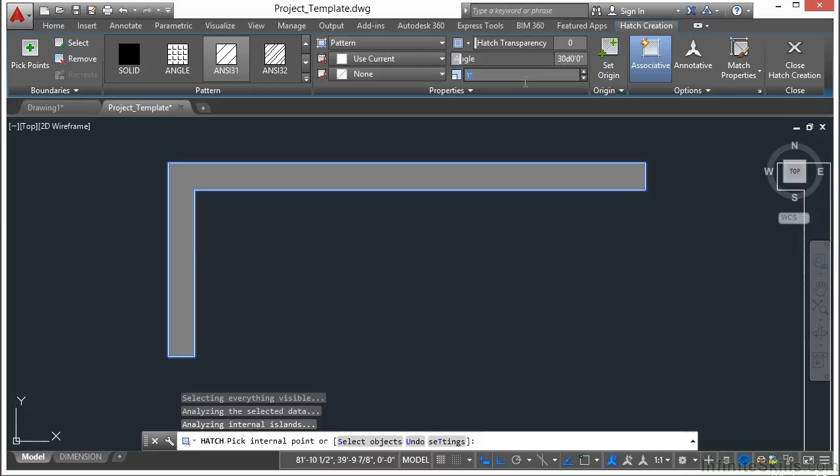We're going to use a hatch pattern of ANSI 31 at an angle of 30 degrees, and pick inside our objects. You can zoom in; we're going to use the pick points option. Click in here. That pattern is a little too tight, so we're going to give it even a little more.

Let's set the scale to 20, and that looks good. So that's the pattern we're going to use: ANSI 31 at 30 degrees with a scale factor of 20.

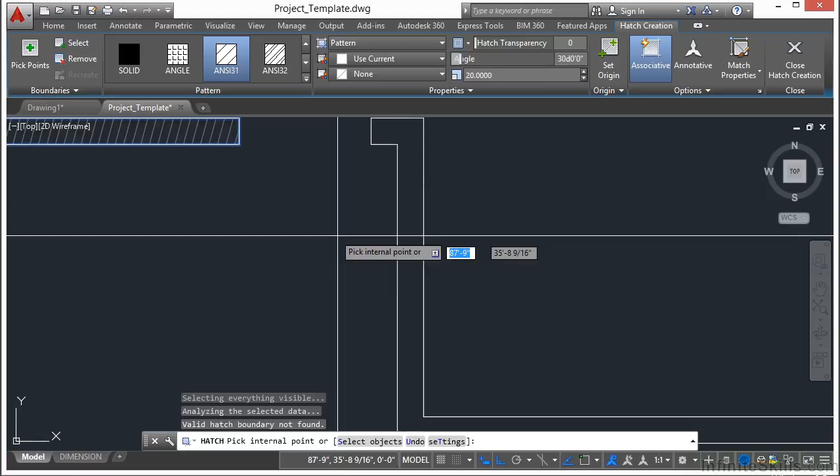And we're going to pick inside each of these objects. Sometimes when you zoom in too closely, AutoCAD just kind of freaks out and can't handle it, so you just have to zoom out a little bit, pick in the exact same spot, and it still works. I know it's crazy, it's really annoying, but that's just one of the little things about AutoCAD.

So just keep filling in each of these wall sections with your hatch pattern until you get them all filled in. When you're finished, press enter. So there's our exterior wall with a little bit of a hatch.

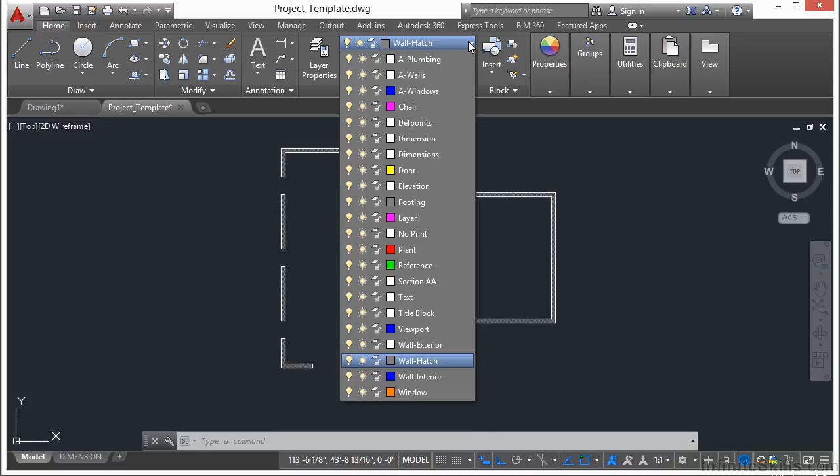Now we need to put in a few interior walls. Let's change our layer to Wall Interior. Start the line command, and we're going to start off right here. Snap to this endpoint, and just draw it straight down to this endpoint. Press return. Now we're going to offset this line.

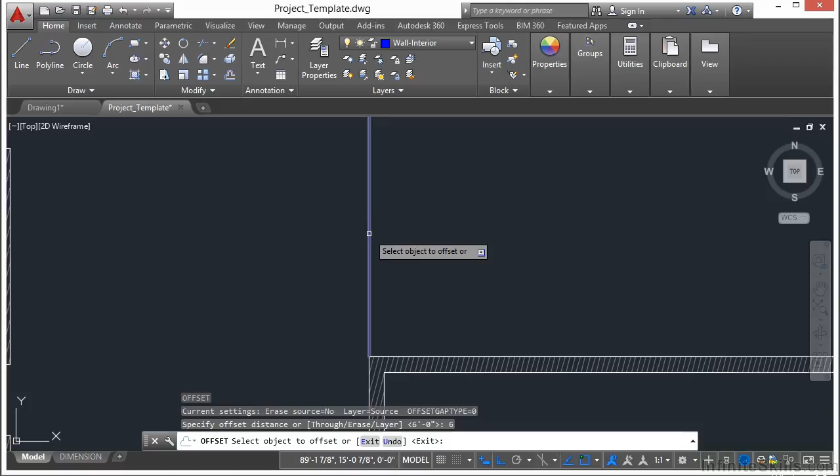Offset it 6 inches, and offset that to the right. Now we need to offset from the top 12 feet, press enter, and we're going to select this line here and go down. There it is.

Use your match properties command, type in MA, press enter. Since this is going to be an interior wall, select one of your interior walls that you've drawn here and select that item. That way it will look the same.

Use the extend command, select this line here, press enter, and pick that one. Press return again. Now we need to offset this line, make it 6 inches. Pick that and extend to the bottom.

So now we're going to put a doorway in right here. We're going to use the offset command, 1 foot 4 inches. Press enter, select that line, offset to the right. Offset again, 3 feet, press enter, select this line and offset it in.

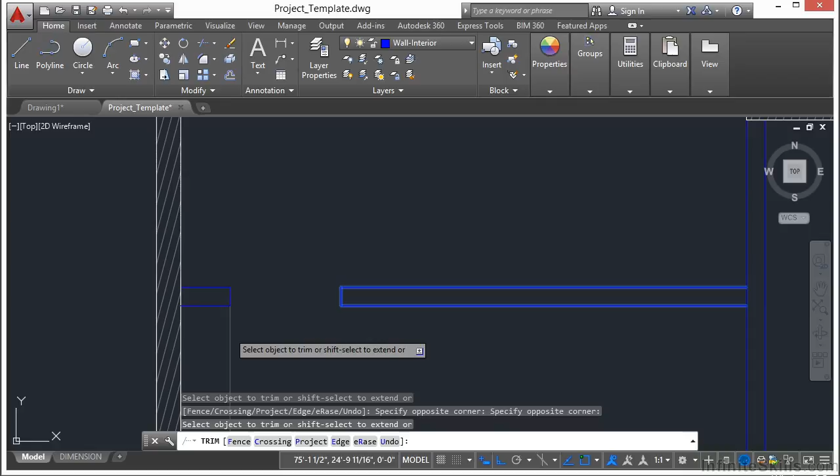Now use match properties again. Type in MA, select this line, and then pick these two, so they're all on the interior wall layer. Use the trim command, select all these items, press enter, and trim it up so that we have this nice little opening. Now we're going to put a little doorway here.

Offset again, 7 feet 4 inches. Select your line here, move it down. Press return, offset 6 feet. Select the line and go down.

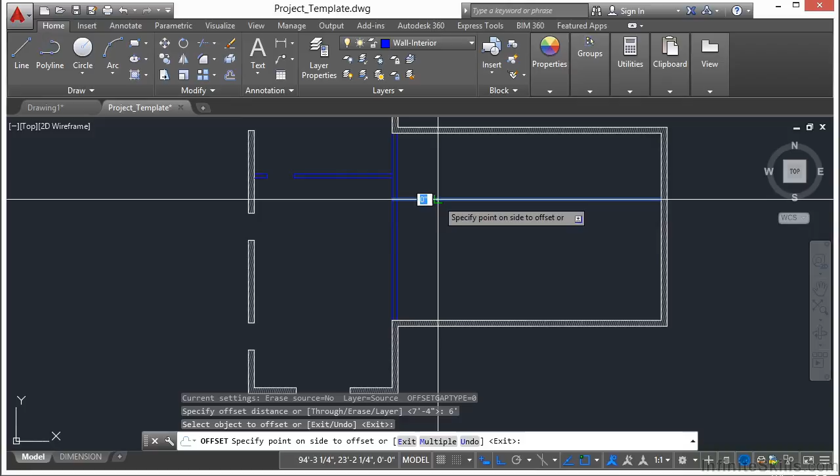Press return. Type in MA for match properties. Select the blue line and then pick these 2 white lines. Press enter and then trim. We're going to trim all of this up here.

So select all of these lines. Press return. Trim those away, and get that little bit out of there too.

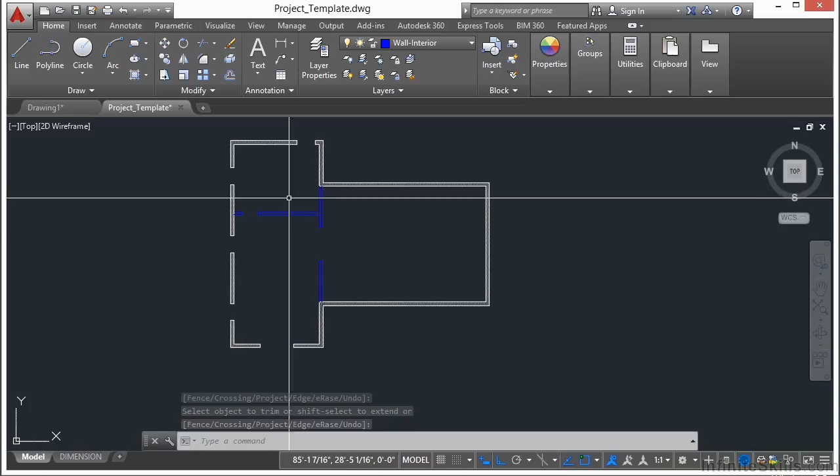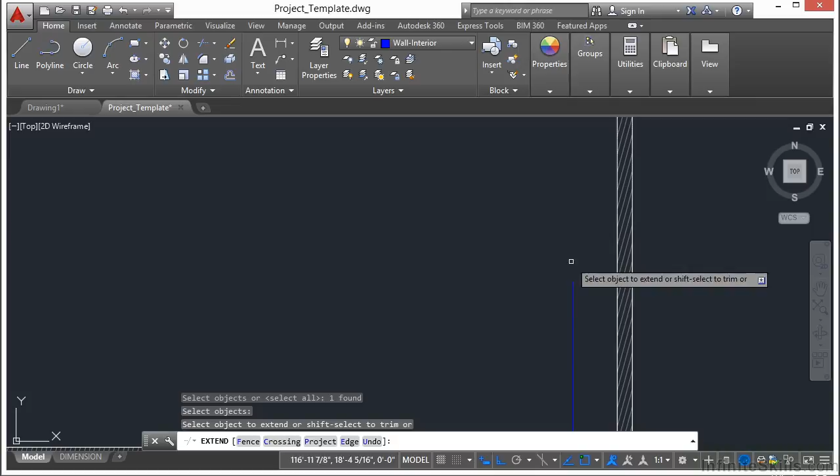So now we have our exterior walls, we have our interior walls, and the last thing we need is to put in a little movie screen. So we're going to offset 27 feet 6 inches, pick this line here, go to the right, click, and return. Then use the extend command, select that line, press enter, come down here and pick the blue line so that now it goes all the way across our room.

And now we're almost done with our model. We just have a few more things that we're going to do in the next section. We're going to insert the doors, the windows, some plants, and some chairs.